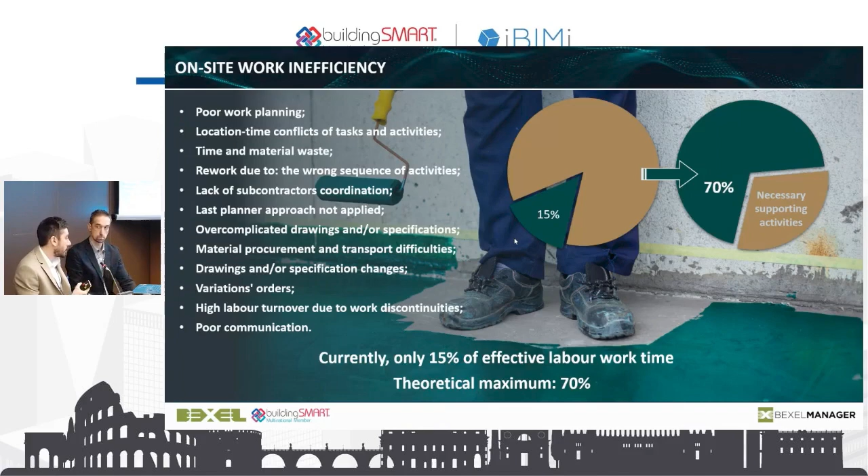First, whenever we start about construction industry in general, we have to start with the challenges and problems, and these are just some of the things that you have probably heard many times. What are the challenges in the industry in general? Those are the poor work planning, location time conflicts of tasks and activities, time and material waste. In general, construction projects are complex projects because more or less on every new project you're building a prototype, so all of these challenges are understandable. Overcoming such challenges is a big task in general.

What we tend to do these days is go with the common data environment approach, where we want to have a platform where all the participants of the projects could work together. But a challenge in this approach is that it often becomes a common document environment. What does this mean? It means that to digitize the process, for some people, means just to change the format from hard copy to digital copy of the document, and not change the workflow and not change, in general, how the data actually works.

What we mean by this is, digitize the process by simply converting your documents from hard copy to digital copy and then upload it to the CDE and share it with other participants. Of course, some documentation could be managed this way, but the majority of the project data had to be set up in a different way. It had to be organized and managed in such a way that you can see the portion of data that is relevant for you as a participant at the right moment.

And of course, that stakeholders could see a big picture of the project, and not just see documents which you have to open and read to understand, and then open a large amount of data to read it to understand what the big picture is. You need to have the option to actually inspect the data and sort it in a proper way.

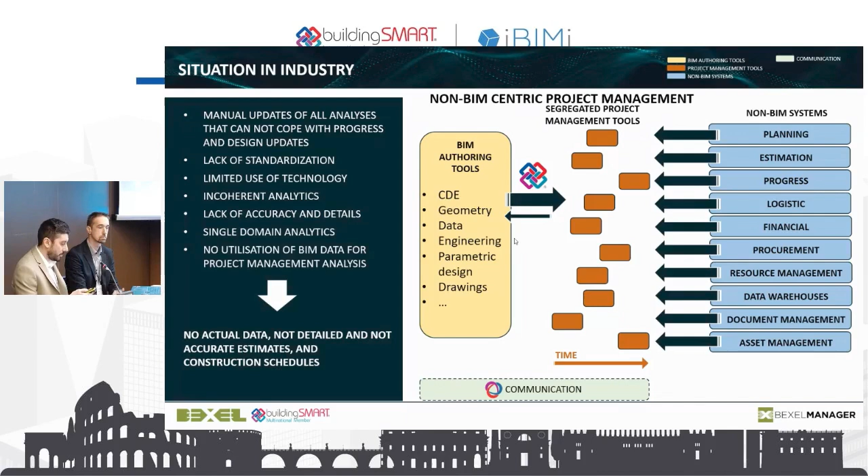It's in a wrong format. It's not machine readable. It's not standardized. And therefore, we are basically losing a lot of time on this rework in every new phase. And this is typically a characteristic of what we call non-BIM-centric project management.

The solution for this would be BIM-centric project management, where the project management process is integrated in terms of workflows and in terms of information source, which means that every stakeholder speaks the same language, data is transparent, data is traceable, and the participants can rely upon information delivered by other teams. So, of course, a prerequisite for this is standardization of data exchange, and this is where buildingSMART has a key role in making such concepts a reality.

So the goal is to improve efficiency, to streamline processes, to improve accuracy and time needed for data delivery, and of course to improve overall management engagement. So we can say that such an integrated BIM project management platform becomes a reliable source of project information, based on which accurate reports are produced and regularly updated. And such reports are then approved by managers and give them just-in-time information and a reliable base for their effective decision-making.

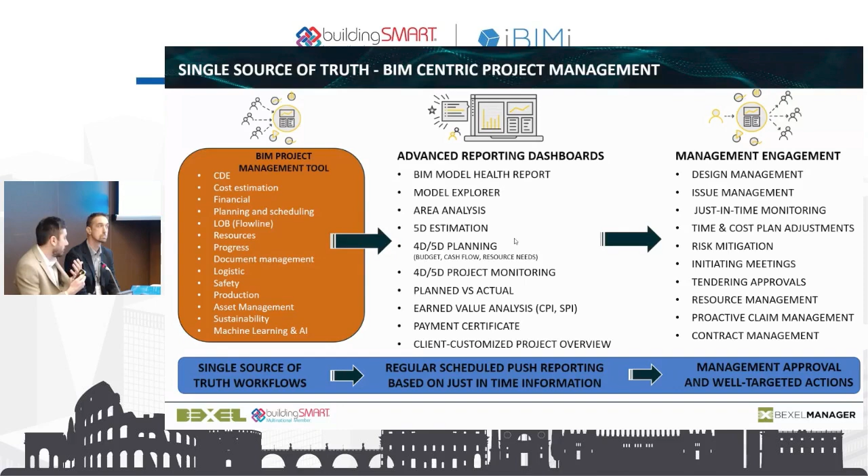So in short, the BIM model in this case becomes a single source of truth for all participants, and it encompasses all relevant information in one place, and a change in one place is reflected in all other places, so every participant has the same picture of the project.

Of course, in order to ensure such a role of the BIM model on the project, we have to make sure that all the data is reliable and verifiable. We have to ensure that data is machine readable and standardized, and we need to have automated quality control workflows to ensure that the large amount of information needed for such an integrated workflow can be processed on time and managed properly.

And of course, besides the data management and data control, which we mentioned in the previous slides, we also have to focus on the data creation process, or feeding the data into our single source of truth. So if we want to fully digitalize and streamline processes of data management, we have to create efficient processes of creating the data, of inputting the proper data into the source. People are not feeding the model with wrong or false data because they want to, but because they just don't have enough resources to do it properly in the traditional way.

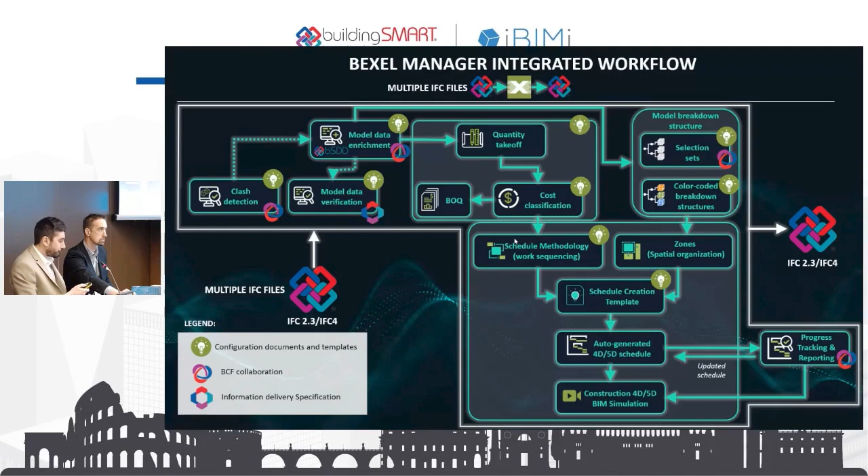And of course, one of the important parts is that all of these workflows are automated so that you can focus on creative tasks and improving quality of the data that are going to the model, and forget about the manual repetitive tasks that are just wasting the resources.

And this is the general workflow, which could be described as a chain of processes that are executed in a chronological order, more or less, throughout the project life cycle. But besides that general workflow, we also have in parallel two main processes that are present all the time. One is, of course, maintaining and updating the federated central BIM model. And another one is reporting and analytics.

So in every phase of the project, from every stakeholder, in every moment of the project, you need to report that data properly, in a proper way, at the right time, just in time, and you need to deliver it to the specific people that need to see that data, to understand the data, and to make decisions.

And today we will focus mostly on this process of reporting and how it works in our ecosystem in general. So we will go through the different processes in project management and explain the process itself, the level of automation achieved in these processes, but we will focus on reporting on the data that is created and that could be successfully managed as a result of these workflows. So now we will switch to my colleague, and he will cover the 3D workflows first, and then we will go with the 4D and 5D later.

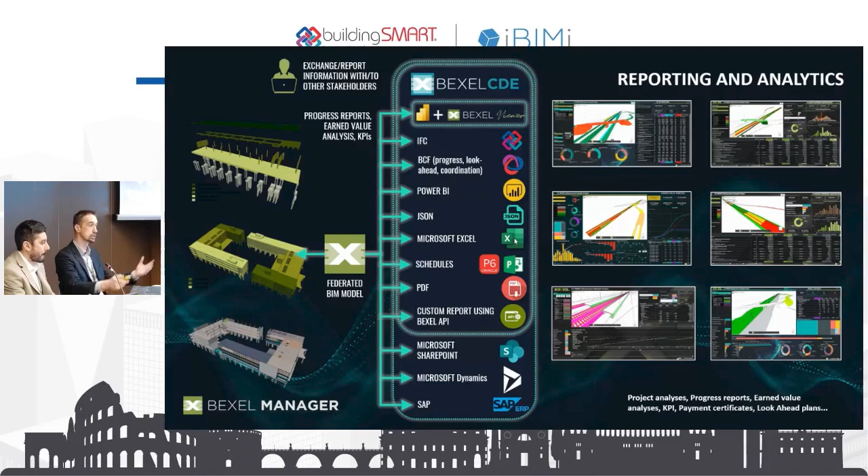and how this information can be properly organized so that each different participant can extract the portion of the information which is valuable for them at that specific time of the project, where this information should be analyzed and exchanged with the other participants as well.

So the first part is data verification, which is one of the most important processes related to quality assurance, and this applies to all project stages. In this case, BIM checks can be performed based on customized or standardized IDS analysis, and we prefer IDS based on Excel spreadsheets, because IDS structured and organized in a simple way is something that, as I mentioned before, anyone can easily understand and change.

So it's really simple and accessible to everyone, and the system will go through these multiple IDS facets and find issues. All elements which are not in compliance with the information delivery specification will be organized into groups by missing or inaccurate properties, missing or inaccurate attributes, classification, materials, and so on. And then all these results can be sent directly through BCF issues to other participants, or exported to Power BI reports, for example, which is, as I've said previously, one of the most important

processes in the coordination. So the first video, which I'm currently presenting, is more informative, just to understand how all this information is preserved in the form of a data container, and where all sources of information are stored. The entire process starts with publishing all results of the analysis created within the software used for BIM checks or other types of analysis. These results can be published to the cloud-based common data environment.

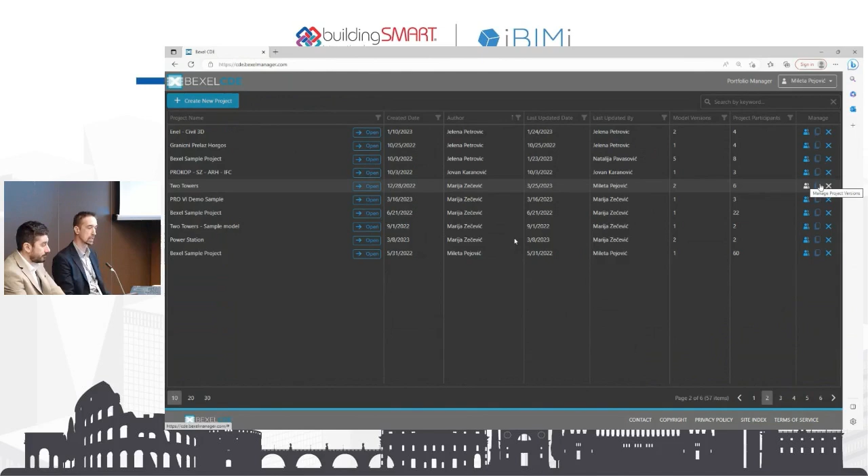And during this process, the user can even specify which part of the IFC file information they want to send to the cloud. These could be the originally used IFC files or segregated into smaller pieces in case you don't want to share or expose entire projects to everyone. In each revision of this published information, we have the history saved, so you can always go back to explore the previous results and information, all stored on the cloud. Project attributes and properties are also saved without any data loss.

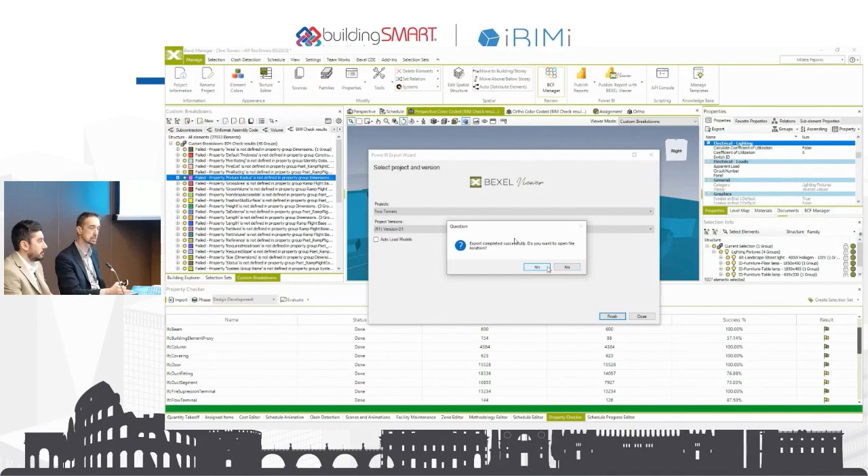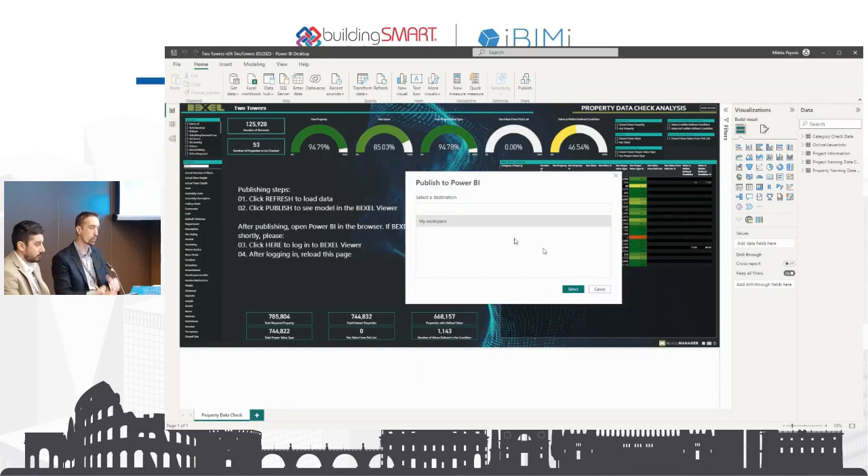On the other hand, all results of performed analysis with additional information such as coloring schemas, clash results, property check results, cost and schedule information are also saved and exported into external sources of information in the form of JSON or Excel spreadsheets. These results are linked to previously exported IFC data, and customizable Power BI reports can present different types of information to different project participants in a really meaningful manner. From personal experience, these results are organized into really clear and visually stunning information, easy to understand for different types of participants.

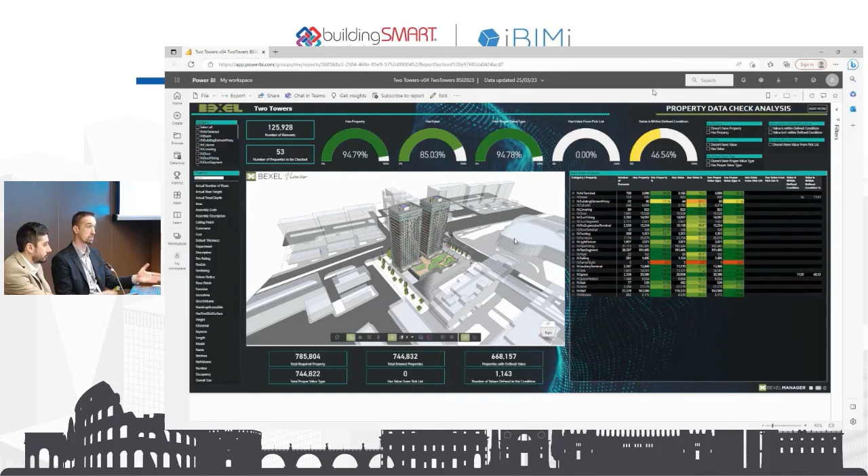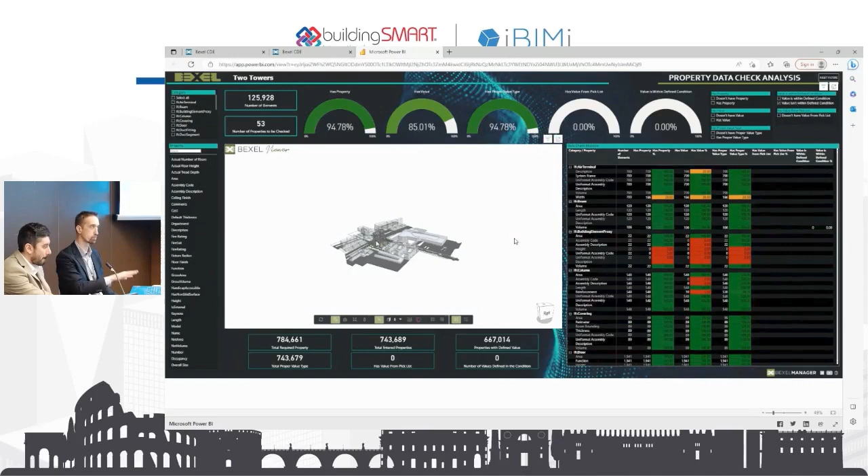So in this way, we could introduce BIM checks to the design team in one way, but also present all these analyses and results of BIM checks to, for example, clients in a slightly different way. So everyone can just take the information which is relevant for them and which is the main focus of the participants analyzing these results. By doing so, we can evaluate and organize inconsistencies. As you may see in the video, all these results can be differently organized. We can analyze different IFC entities, different classifications of the elements, and all the data can be stored and accessible anytime.

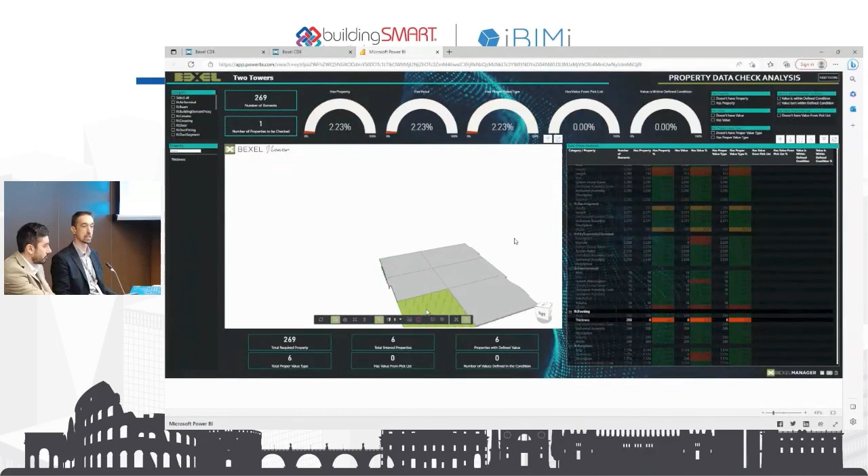And when the project is updated, and this is one of the best benefits of this kind of approach, the system will automatically update results. Just by using the export button, we can export all these results again. Everything is stored on cloud, and we have another revision of these results, which can again be visualized and analyzed for the next stage of the project.

Another important type of BIM analysis, especially in the early stages of the project, is coordination and collaboration between different trades, and performing clash detection is valuable in every project. To briefly explain the automation: it starts with the federated BIM project, which is fed with predefined or standardized templates for creating clash detection groups on one hand, and clash detection configuration templates on the other, which are mixed together, and the system will automatically find issues between different trades and groups. All results can be instantly saved and exported to different types of reports.

You may see that these reports could be different types: PDF files, Excel spreadsheets, HTML files through API to connect with different systems, and also Power BI reports directly. So again, everything is stored on cloud.

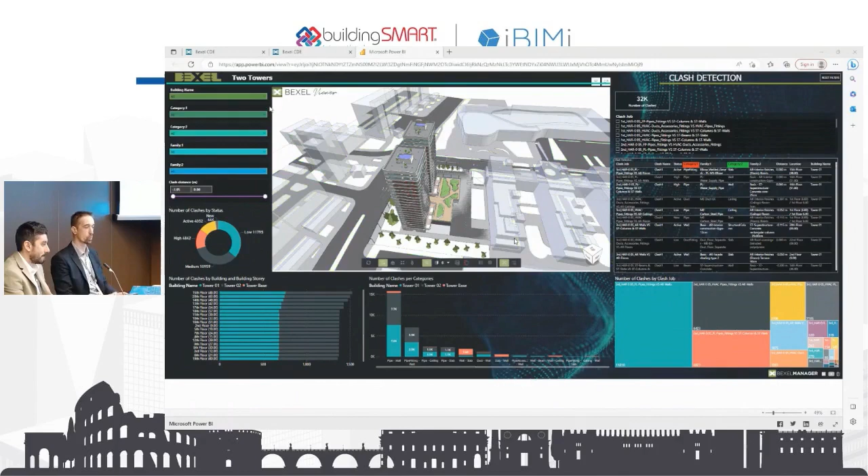All this information, as I said previously, when the Power BI report is open from this system, we can analyze results. And again, based on different data subsets which can be exported, different results can be saved on cloud and also presented to different participants of the project.

For example, clash results between coordinators and between design teams are presented differently, and also for subcontractors, for example, we can include cost and schedule data. So a client or the project owner can see clash detection analysis combined with the cost information.

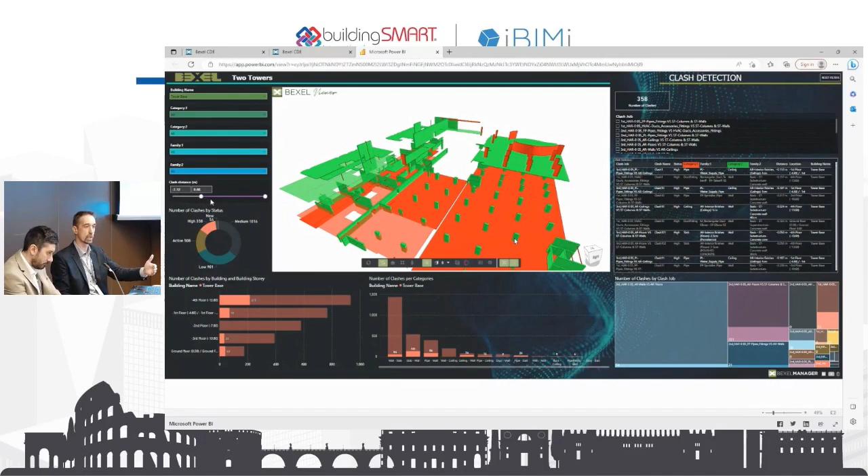And for example, design team can just see clash detection collisions between different trades without any other information which are not related or important for them. So they can just analyze information related to, in this case, different buildings, different trades, different types or priorities of these clashes, and also some common information such as building stories or different subcontractors.

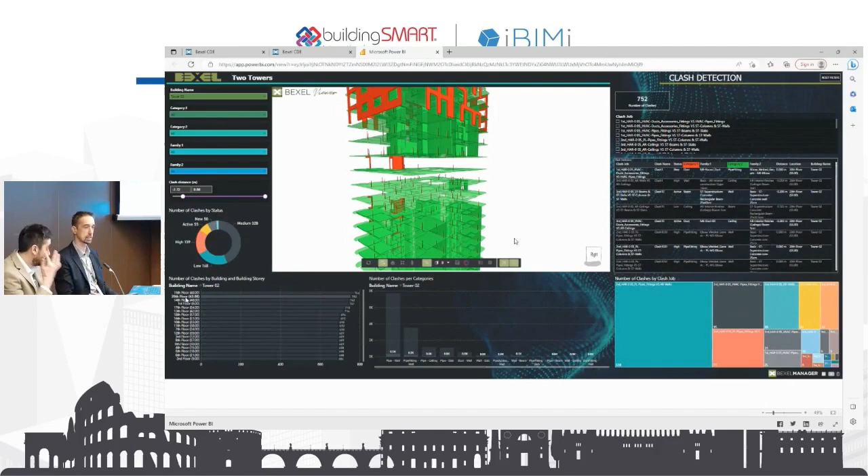So every subcontractor, or any trade, can see the clashes between just their own different types of installation, or multiple trades or multiple subcontractors can see where they have collisions with the installations between each other. So all these found issues can be relatively easily identified and also organized and resolved in order to avoid any possible issues during the construction itself.

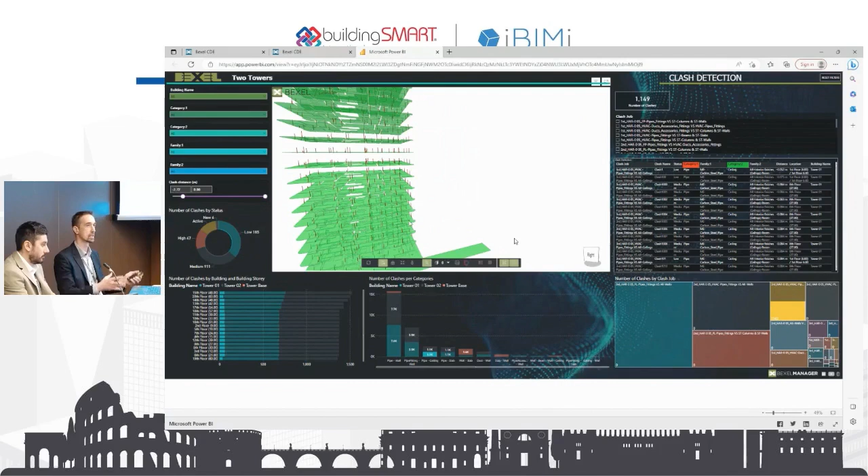And of course, if the clash analyses are performed progressively during several months of this kind of progressive clash testing and design collaboration, we can also export this kind of data, which contains all this progressively saved information during multiple previous months of coordination process.

These results can also be exported into different types of results, for example, combined information into portfolio manager. And this is something that I will show you a little bit later. But currently, these are just different types of views which anyone who is actually exploring the process of clash detection can access very easily.

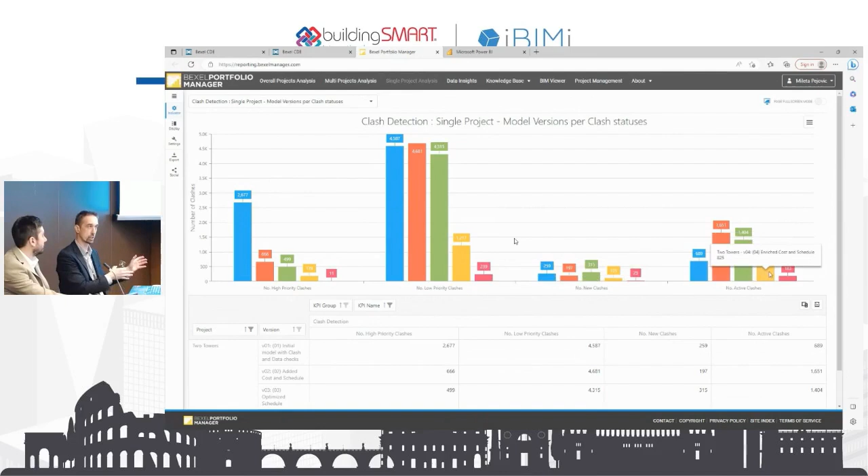All these results, which are done in a past period, can be exported into this kind of cloud-based platform, which saves all this data, not just from one project or multiple versions of one project, but also from multiple types of the project. So you can analyze different types of collision, or not just collision. We here talk about clash detection, but you can also analyze cost information in this manner.

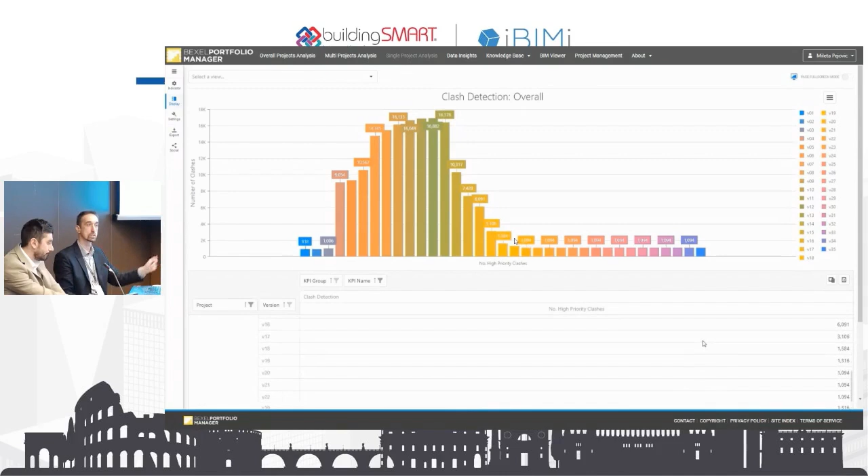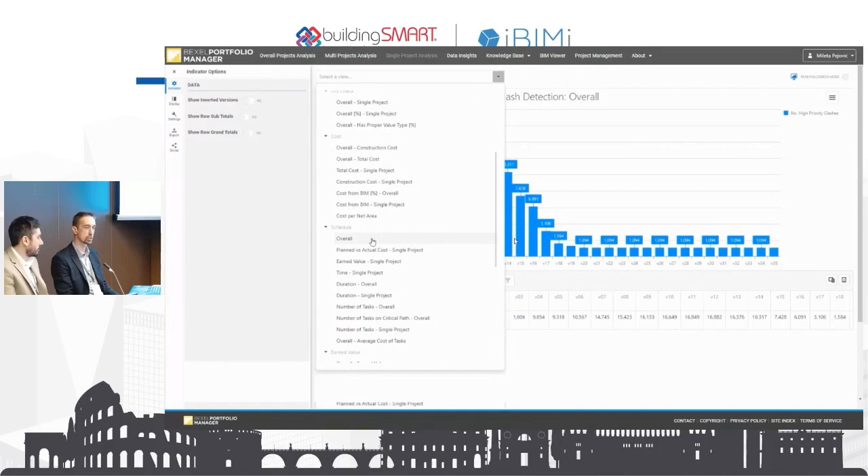You can analyze the quantity information, multiple buildings, multiple types of the project, and analyze what is the cost of this type of project against another type of project in multiple different countries. So you can analyze, okay, this is a cost or number of the clashes which I obtained in one country, and this is the number of the clashes in a similar building, similar size of building, in the other country. So this kind of information is really valuable for the project owners as well.

So even if the model is missing some required properties or values of these properties, or if some of these things are not accurate, we can use another feature or another process to automate the data enrichment of the model itself. And again, based on using customizable Excel spreadsheets, for example, because these are open BIM standard, we can add information or properties to BIM elements.

And all properties, no matter if these are original or added, can also be saved within the IFC schema or separately as separate chunks of information and exported to Power BI. This allows us to do various Power BI templates for different purposes.

And also, I just want to mention that if we previously, for example, used IDS for verification of the quality of the BIM model, similar templates for IDS could be used for data enrichment. So based on, for example, IFC entities or attributes of some of the elements, we can do a similar thing to enrich existing elements based on these predefined attributes.

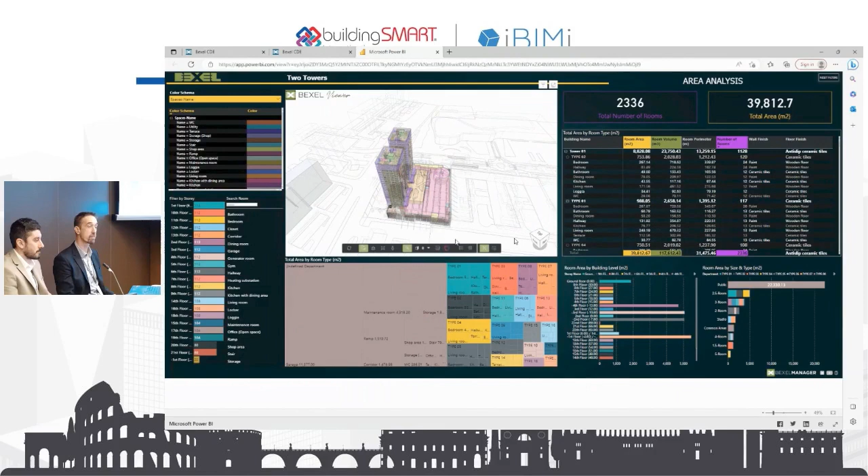From the, let's say, open BIM uses, using our application, we can export different types of information. And as I've said previously, it's really important to decide which information we want to share, at which point we want to share information with respective participants on the project. And in this case, we, for example, are just sharing or analyzing area information.

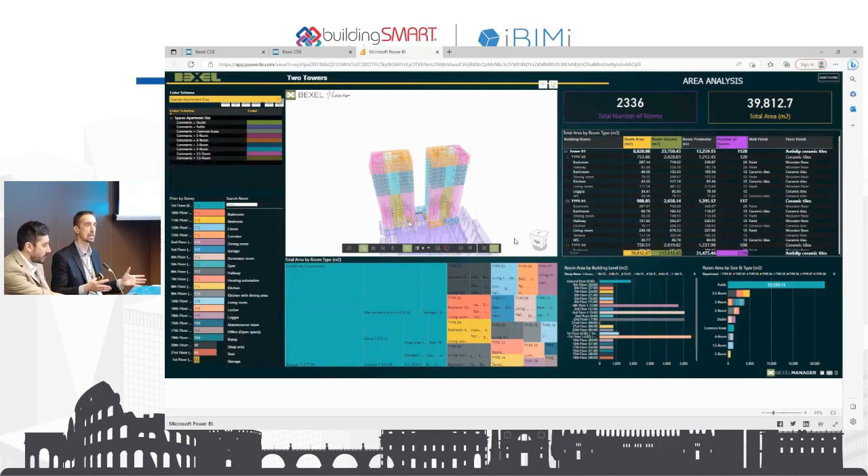So in this case, IFC spaces information is actually sent to the cloud, and using, in this case, a Power BI template, which is done for this specific purpose of the project, we can analyze areas of the project. And this could be really useful in the initial stages when we're deciding about the areas, which types of areas of the project these should be.

And based on results of these types of analysis, we could discuss when and what on the project should be changed before the construction or the next stage of the project starts. For example, from the concept design to the real, let's say, issue for construction stages. And this is just one of the examples how we can use this data and how this data is actually saved.

So in one place of this template, we can see quantities of the different areas, but on the viewer, we can see different types of color schema. So we can always see, for example, area, volume, number of users who can populate a specific area, or we can see, for example, finishing types of floors, walls, ceilings. And at the same time, we can analyze how these areas are differently, let's say, structured.

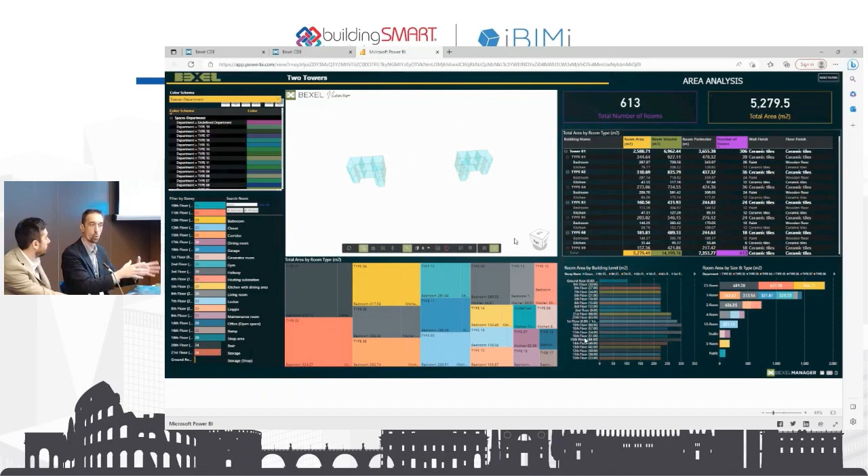If we see, for example, in this case, different departments, different types of areas, or different uses of this area, we can differently color code all this information based on what we currently want to explore. In this case, we see, for example, different departments, multiple types of the projects, and in this case, 8 different types of rooms. Each of these has different, let's say, types of rooms itself.

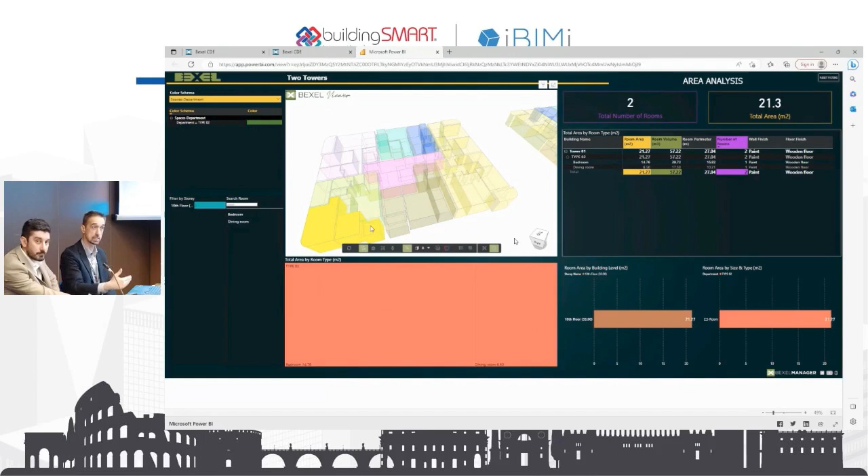We have areas, rooms, zones, whatever, and all these can be differently color-coded, differently organized into different, let's say, buildings, stories, sizes of these rooms, anything. Also, we can include information about the usage of electricity per each room, or, for example, lighting analysis as well. So all this information can be stored, exported, and again, it depends on the user which information they want to use and for which purpose they want to analyze this information.

And this is just another example, a different type of project. This was previously two high-rise buildings, but in this case, we have a power station building. And a power station building has totally different types of areas. So these different types of areas can be organized in a different way. We can analyze different information.

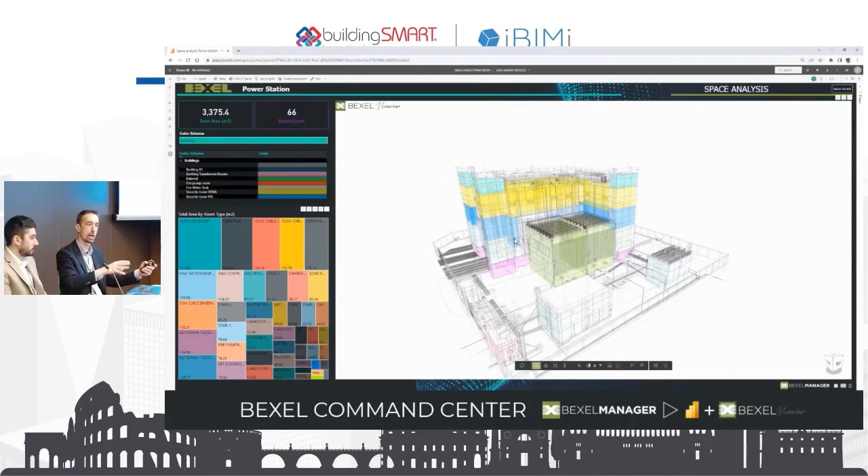We now don't really need to understand what the different types of rooms are which can be used to sell different types of, let's say, apartments. In this case, we are more interested in, let's say, power consumption. So in this case, we can analyze power consumption information. We can analyze all different aspects of information which are stored and available based on what we want to analyze at a specific moment.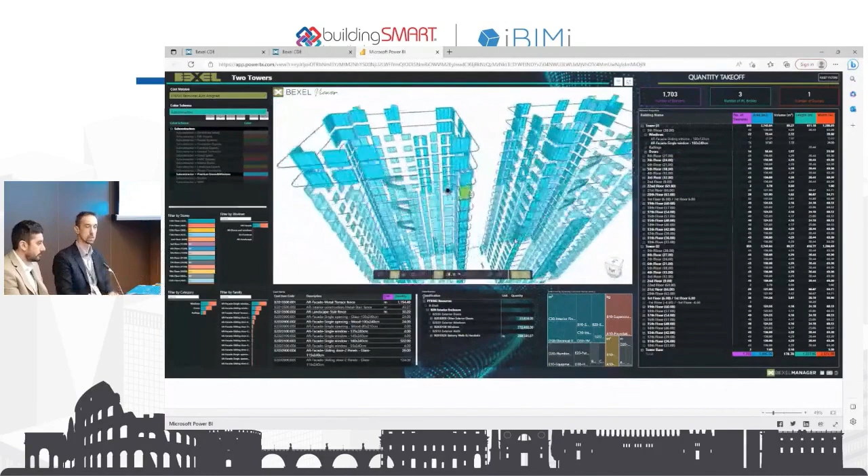So another example of how we can export and again analyze different types of information in a timely manner is quantity takeoff. Previously we analyzed, for example, just simple spaces, but in this case we decided to just share quantity information. So we have 3D IFC information related to geometry of the elements, related to the quantity takeoff of the same elements that we currently see. So we decided not to share, for example, cost data, data related to clash information, property checks, and so on. In this case, the template that I'm presenting now is used for quantity takeoffs.

And someone who actually wants to do some kind of tendering packages can use these quantity takeoffs to organize data, organize packages that they want to create or to share with other participants on the project. And this is really interesting because it's interactive and it's really easily accessible.

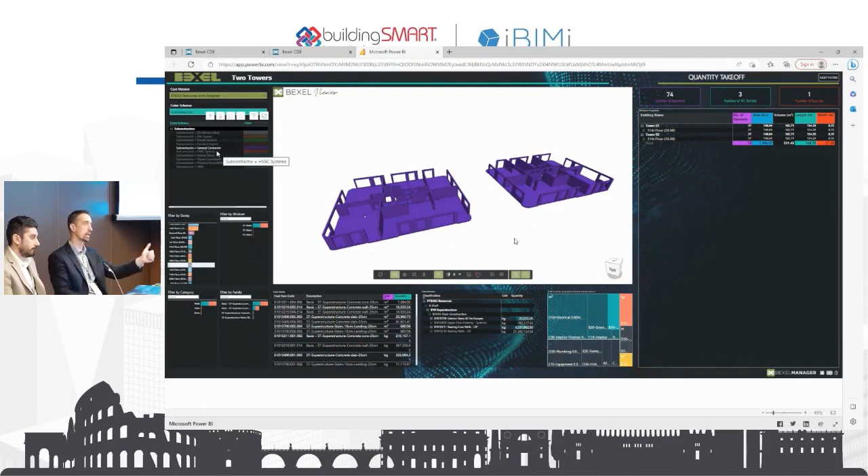So anyone who has a relatively simple understanding of how the entire system works, where the information is saved, and what is behind the IFC standards, can just simply analyze this kind of template and understand, okay, this is where my quantities are, these are the accurate quantities, and for example, analyze these quantities based on subcontractor, different types of elements, different building stories, different trades.

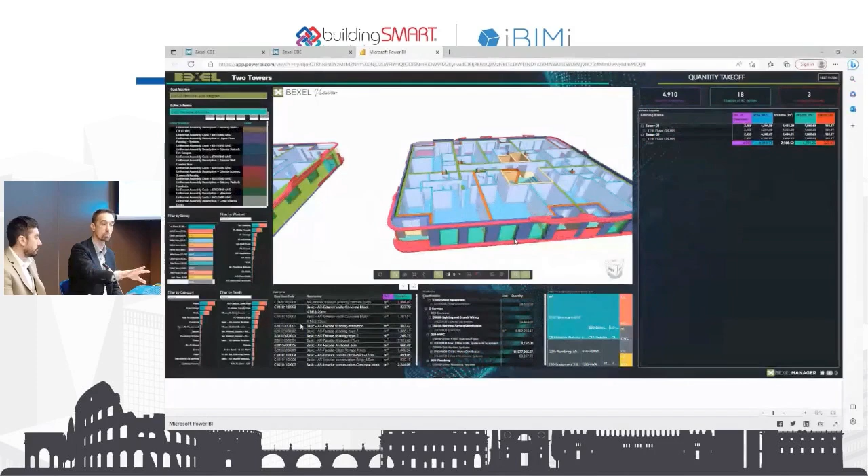For example, we can simply analyze the piping system, where and what kind of piping systems we have in each level of the building, and then we can analyze each quantity item of these selected or visually presented items, and we can see exactly what the quantity is and what type of information it is. Also, we can color code these elements based on, for example, a classification system, in this case Uniformat classification, or we can do any kind of color coding based on any classification system.

So everything is totally open to everyone, and based on the project itself. So any classification that you are using, all this information is linked to 3D elements, and then we can analyze and export this information and separately use different types of information for the specific use case that we are currently working with.

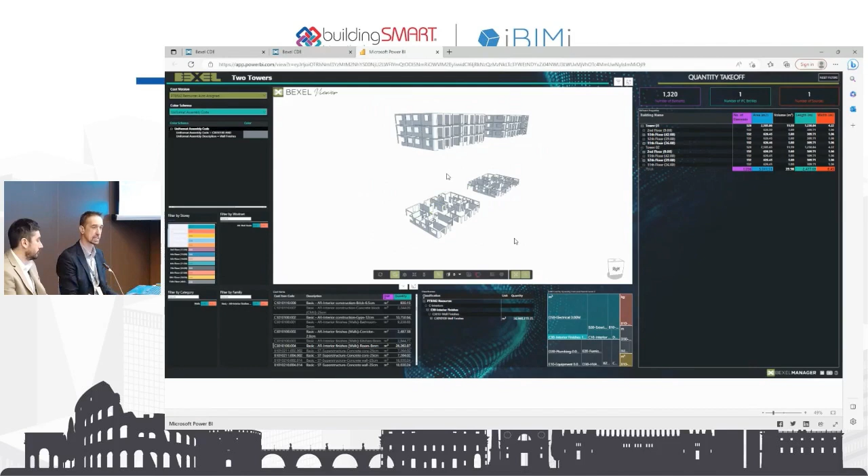In this case, for example, I'm just presenting some interior partition walls on multiple stories. And we can really easily see where and what type of these partition walls are. And again, we can very easily understand what is the quantity, what exactly are the types of these walls. And again, this could be done for any type of quantity item or any building part.

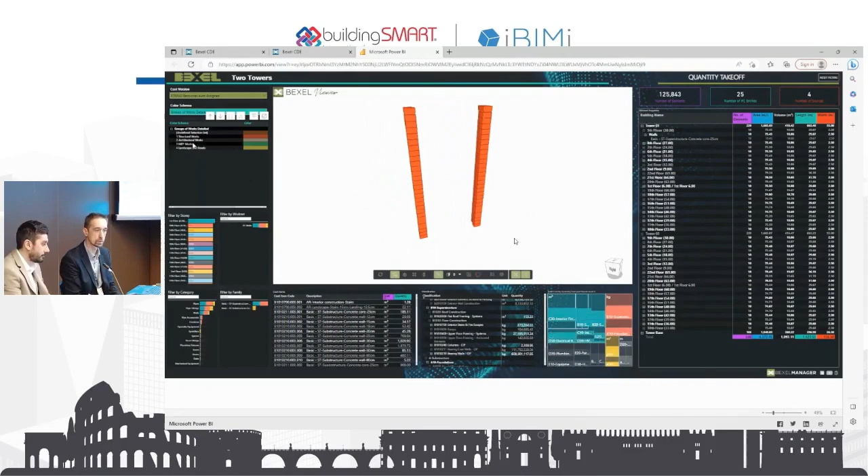So foundations, now we can just analyze foundations based on specific subcontractor, different types of structural works, core walls. Really simply, we can visualize and understand where and what type of the works are. And then this kind of information, again, is saved. When we update the project, information is updated. So we can just update the entire Power BI template to the online.

And then when we access the online platform, we can see the previous results, history, and we can see the updated information as well. And we can see what the changes are, and we can have the relevant information just in time.

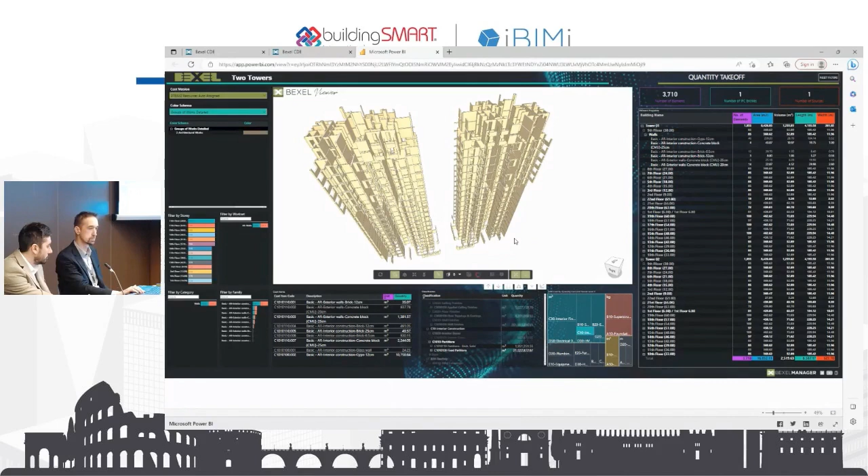And again, just for the last example related to the quantity analysis, or the part of the session which is related to analyzing more or less simple information such as quantity takeoff properties, clash detection information, more or less all information which can be automatically obtained from the information directly extracted from the geometry or IFC files itself.

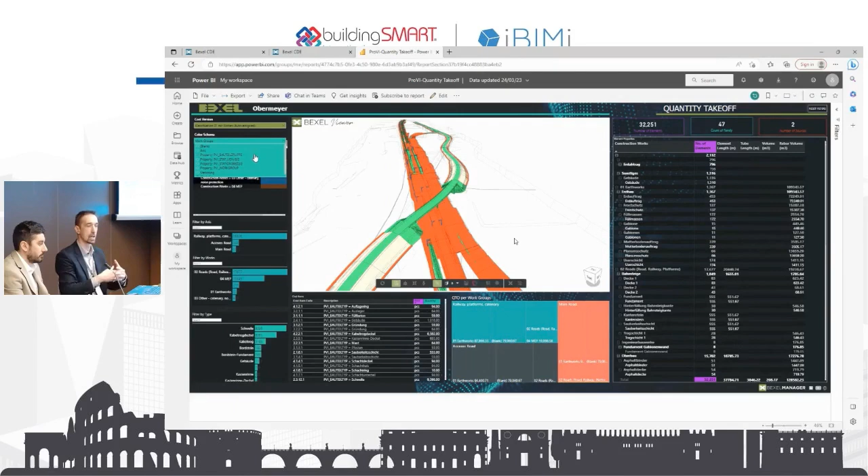And in this case, I'm just presenting how the same or similar template for quantity takeoff can be applied for an infrastructure project. In this case, it's a railway project, and we can analyze quantities based on different types of works, for example, for railway, for a road, or for the bridge above the rail, and also based on the subcontractor. So if we have multiple subcontractors, or again, different types of work.

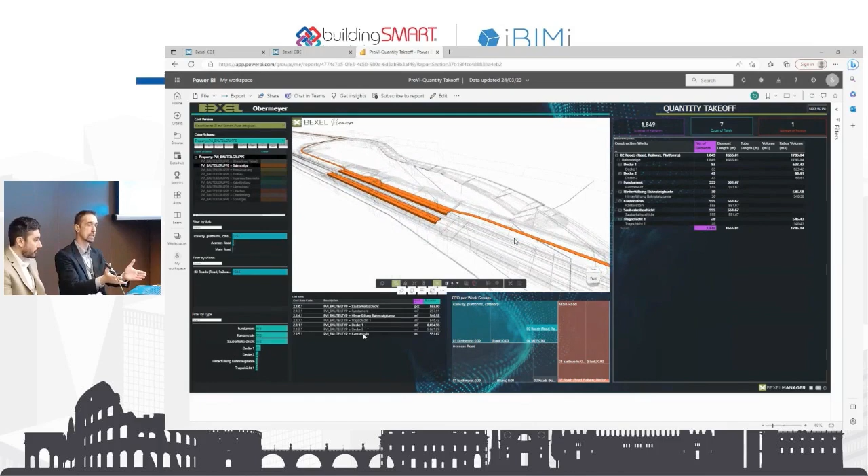This is, for example, excavation, but we can see different types of work, for example, concrete works, or setting up the electrical railway roads, or something like that. So anything can be easily accessed by anyone. It's quite a simple type of template containing relevant information. And this is, again, related to the information which can be almost automatically extracted from the IFC files, and maybe additionally enriched if it's needed.

But now I want to hand over again to my colleague to explain a little bit more advanced processes, when we can extract and analyze information not just automatically extracted from the BIM model itself, but something that we can do additionally by adding cost information, schedule information, and so on.

Thank you, Mileta. So if we talk about cost management in our platform, we have two general approaches. The first one is a more straightforward one, where you have your cost classification system, whatever type and standardization it is, or if it's completely customized for a company, and you basically can import that cost classification in the form of a machine-readable Excel spreadsheet, define what we call element queries, or the filters, which will allow the link between cost item definitions and the models, and a quantity formula, which will define the way you're quantifying your data for that specific cost item. And then, of course, link it to the model elements.

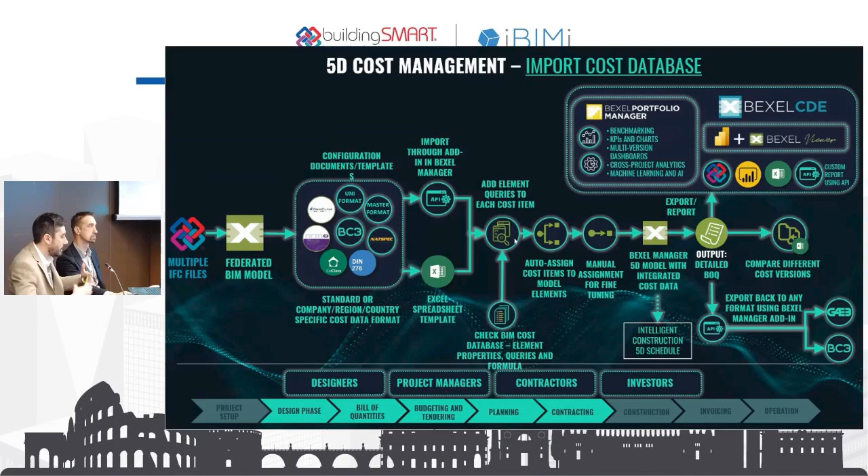And with every new update of the model, the process of updating the cost is basically completely automated when you just update the existing cost classification, of course. And that cost classification then could be reused on the next project, and you're just using the knowledge that you have acquired on one project, enriching it, updating it, and making that knowledge base bigger.

Another one is where you have the ability to use predefined templates to auto-generate cost classification. So where you don't have the cost classification with the defined rules linking the model elements, where you don't have the quantity formulas predefined for every cost item, but you have templates which you load from your knowledge base that are prepared, and that automatically, based on these templates, based on the coding system that you have, based on the quantity calculation rules, define the cost classification for every new project.

Both of these processes are highly automated and allow you to free up the resources needed, in the first place engineering hours, for the 5D phase of the project, so that the experts could focus on the creative work. Experts could focus on creating reliable, accurate data that is up to date with every new project update, and not lose their time calculating something in a manual way, where even when they get good information, too many resources are spent on that specific calculation, and that information is already outdated.

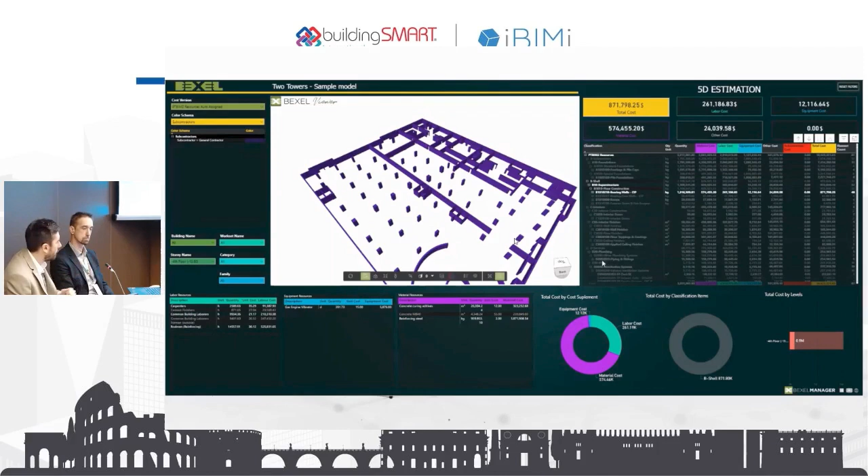As a result of this process, we can export such interactive Power BI dashboards, where other participants could approach this database, but not only see it as a single database or some PDF document where I have to go through the rows to find exactly what part of the cost classification is relevant to them. They could very easily sort the data, reorganize the data, and focus on the part that is relevant for them in that moment.

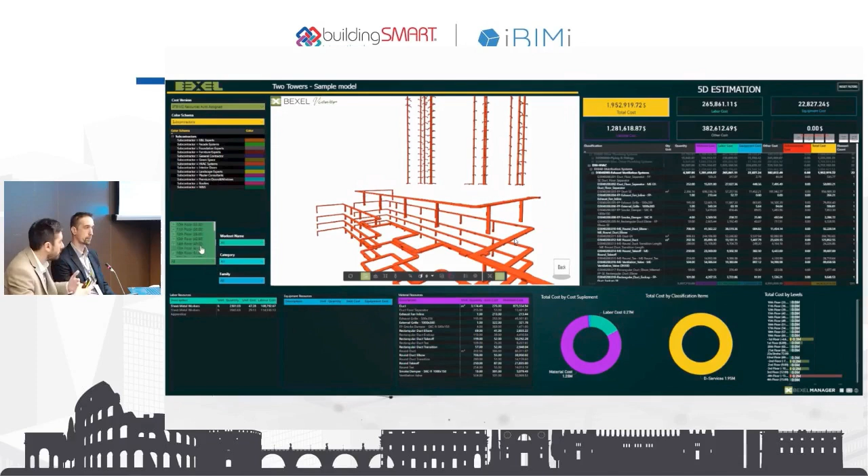And that's the major power of this approach, where all that data is very easily readable and manageable. Maybe for one subcontractor it is important to manage resources, or the other one is managing just the unit prices and things like that. So you can customize these reports in an unlimited number of ways, see the relevant information in the relevant moment, and navigate very easily to the part of this cost database, of this budget, that is important to you.

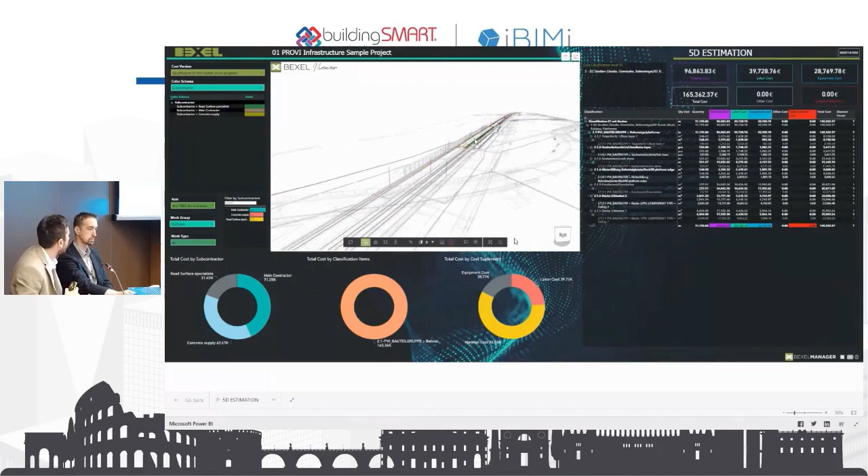This is again a very simple example of the same dashboard, the same type of information, on a completely different type of project, infrastructure, where you don't have standardized classification systems in terms of IFC entities and all the relevant classification categories, but you can still access this database and navigate to the custom properties defining your spatial structure, your work groups structure, and easily see the part of the project that is relevant for you, whether it's a subcontractor, a work type, or some spatial category.

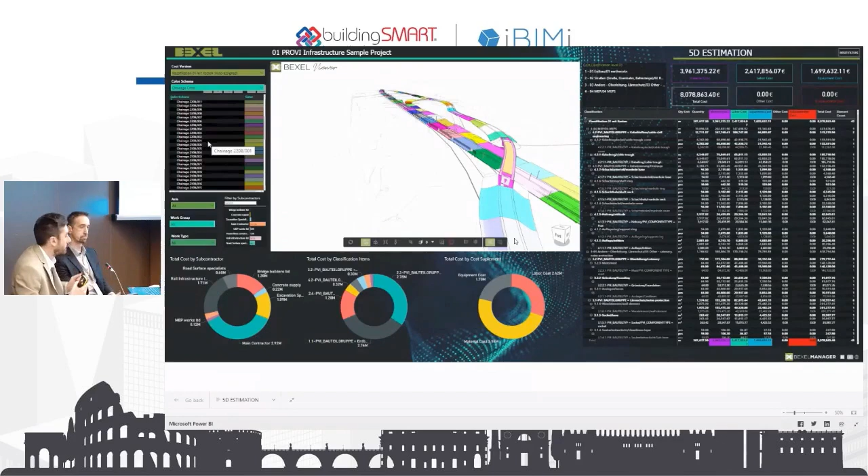And of course, it gives you the opportunity to have verifiable data in the first place. When you click on certain information that tells you how much something costs and what the quantity of certain work is, you can see exactly what was meant by the person who created that data, the BIM manager or in this case the quantity surveyor, what he was counting in when he calculated it. That's the highest quality of this approach, where you don't just look at the numbers and have to trust them. And in most cases, people just don't trust them.

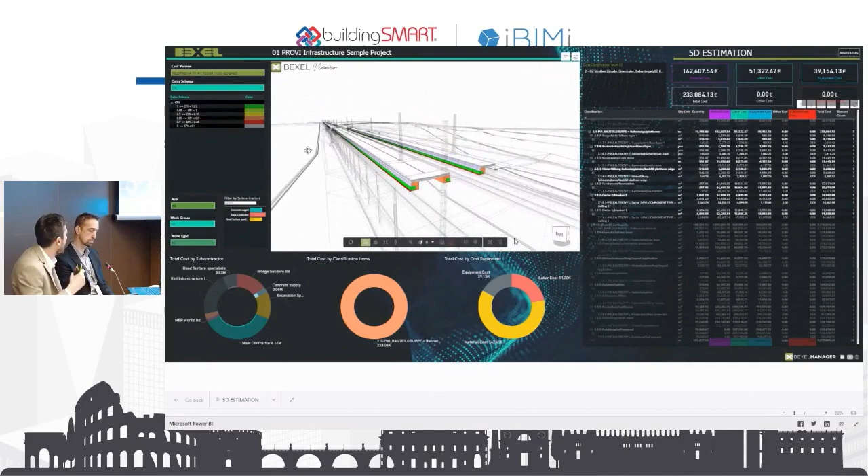They just raise the contingency, and that's why prices go higher and risks are higher, and then everybody loses. So in this case, data is transparent, data is traceable. You can trace the source of the data, so whatever changes in the source changes in the data as well. And you can make sure that what you're seeing is what was actually calculated. So that's probably the main advantage of such an approach.

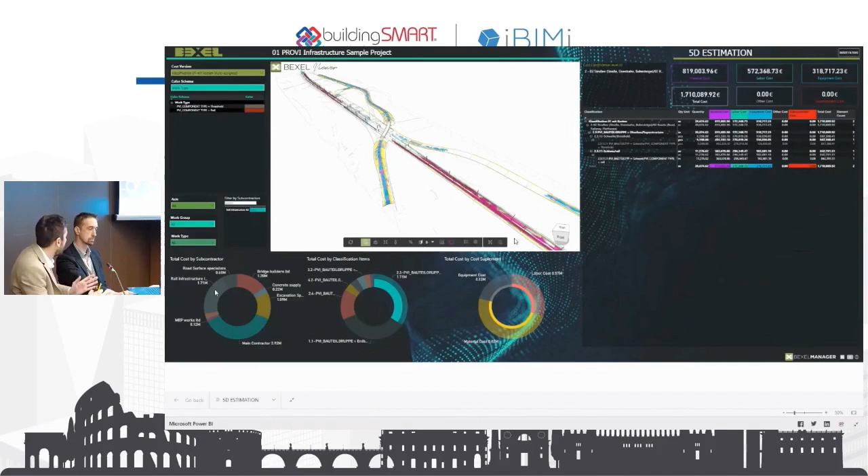Of course, the platform itself also allows you to create animations in this sort of report, which again gives you the opportunity to combine different domains and see not just the 5D data and the cost, but also the time dimension of the cost. So you can see when you're going to have certain types of works, when you're going to get certain subcontractors, and so on.

When we talk about 4D and 5D construction planning, this is probably the most complex part of the project management workflow, I would say. It requires a lot of engineering hours to develop proper schedules, and then to link those schedules with the resources and with the model elements. So this is where we press really hard when it comes to automation, and where we probably achieve the best results, I would say.

We were able to automate the process of generating the construction schedule, where we abandon the workflow of creating one task at a time, one relationship at a time, and allow the planner to focus on the logic of the schedule, on the work sequence, the spatial structure of the project, the optimization of the schedule, and get rid of repeating the same schedule tasks and relationships and wasting hours on manual labor.

So I'm going to try to briefly explain to you the logic behind this system. We basically analyzed how the planning process works in general, and it simply goes through two main processes. One is spatial project organization, or spatial works distribution, where you distribute the works on your project by spatial categories. That means if you have two buildings on the project, you're first going to distribute it to building 1 and building 2 and define the relationship between these two zones.

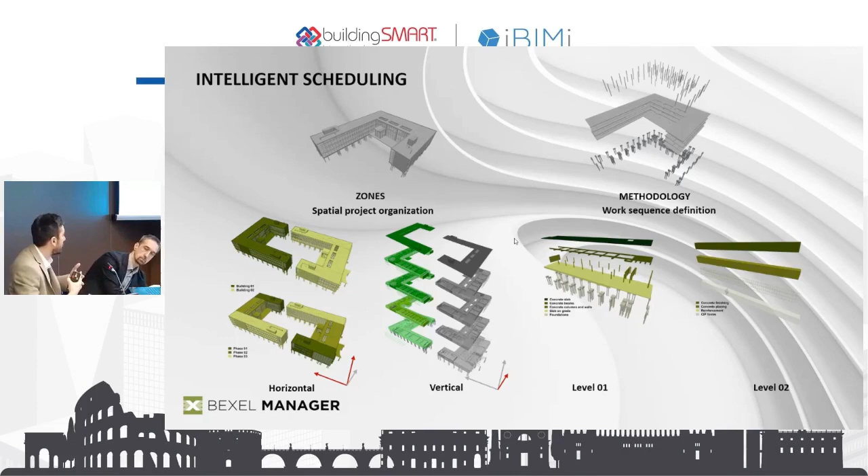So in our approach, we're organizing levels of schedule structure. That means you're organizing levels of spatial organization and levels of work sequence definition for a complete project in one central place. And then the computer algorithm combines all of these logics together and creates the schedule itself.

So just to simplify it, you specify the order of executing the buildings, then the order of executing the activities, sub-activities, floors, and subzones. And the algorithm combines all of these logics and creates the schedule, meaning it creates the tasks and the relationships based on the logic the human planner created and input. Why is this important?

It is important not only because it cuts the time for planning itself, but because the whole process is scalable. The effort you have to use for a 2-building project is more or less equal to a much larger project of 20 buildings, because you're just defining the logic of schedule organization.

So let's say those are two projects with the same technology of execution. The methodology of work sequence is more or less the same, so you can reuse the knowledge from the previous project. You just modify the spatial structure of the project, which is more complex in this case, and you get a schedule that is like 15 times bigger, but with more or less the same engineering hours spent to get good results.

And why is this important? Because this gives you the opportunity to create accurate, detailed schedules, and a more detailed schedule is in general more accurate and more realistic. It gives you enough time to focus on what is relevant, on optimization of the schedule, on resource leveling, on all those things you just don't have enough resources to do if you go with detailed scheduling in the traditional way.

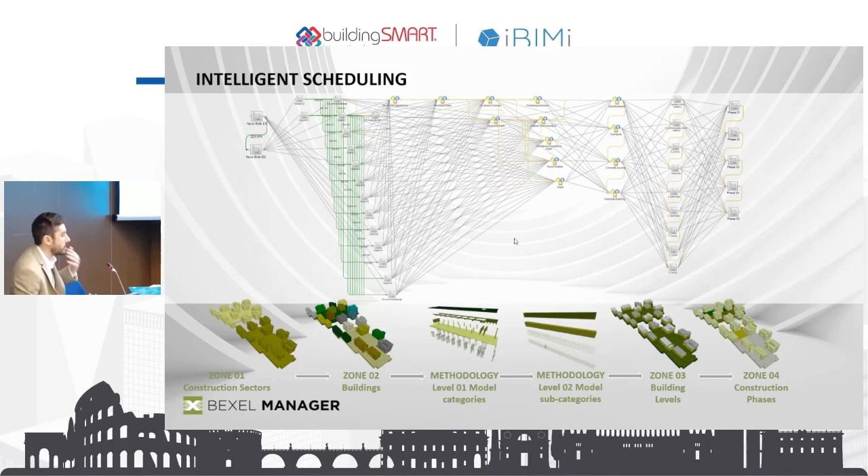Also, this methodology is not limited to this example of high-rise buildings. We also use it very well in infrastructure, where the spatial logic is a little bit different. You don't have horizontal and vertical distribution of works because those are linear projects, but you have linear work distribution in terms of chainages and axes of execution, and you can reuse the methodology in the same way as with the buildings.

What this means: if I build a tunnel or 5 tunnels, I'm going to create the methodology for one of these tunnels and use it on all 5, if the technology is the same, because the work sequence is the same, and I can just rely upon the system.

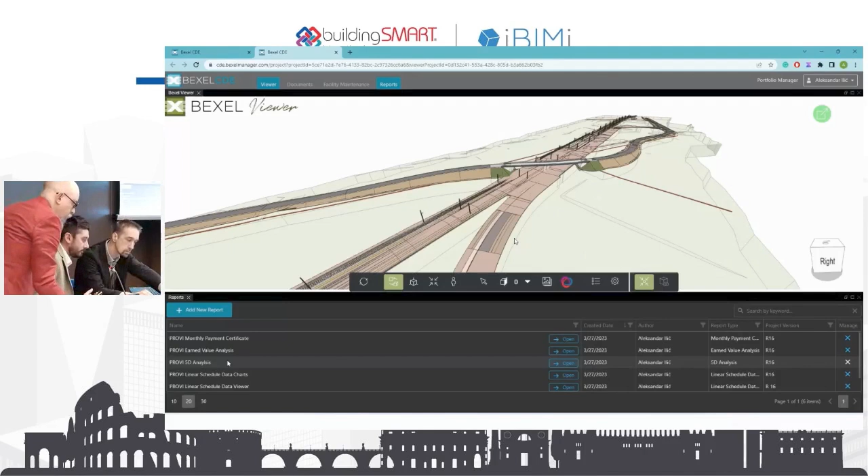Can you just, yeah. Okay, thanks.

So, okay, today I wanted to show this video, which is specific, but shows you the power of this approach of managing the data, I would say. So this is a completely linear schedule, linear project. It's an infrastructure project, a railway project in Germany.

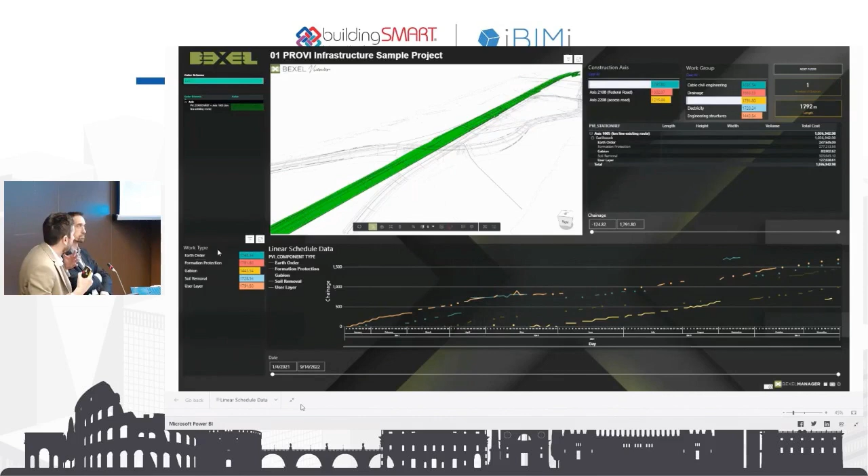And the point is that, let's say, visualizing the data for the schedule doesn't have the same requirements as with the high-rise building. So the Gantt chart is not that useful. The line of balance view, again, is not giving you the complete accurate picture of the project. This is where most of the planners require what we call linear schedule data.

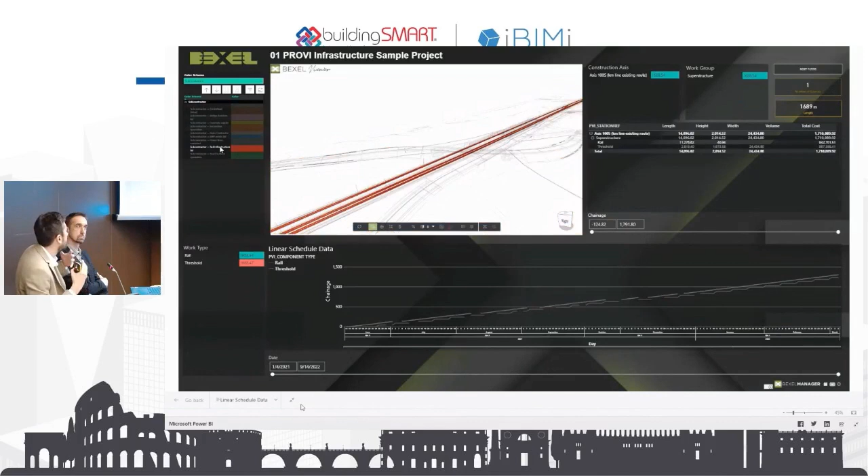And by managing the data in such a way that you can just export everything from BIM in an open format, and you can, I would say, play around with all the data and reorganize it the way you want, we can just simply in Power BI achieve what we need. We can just recreate the linear schedule data and actually see the project data.

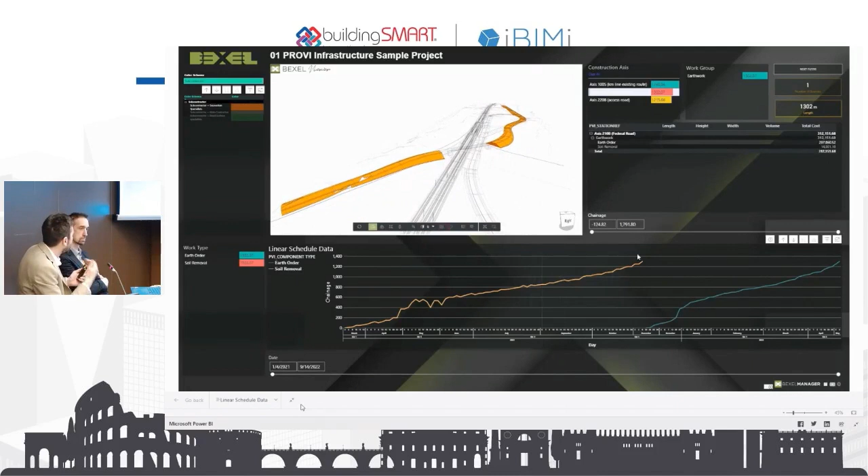So it's the same project data as with any other project, but we can reorganize it to see it the way we want to see it. So in this case, we want to see a linear diagram, because that diagram gives us a better perspective of how this project is going to be executed.

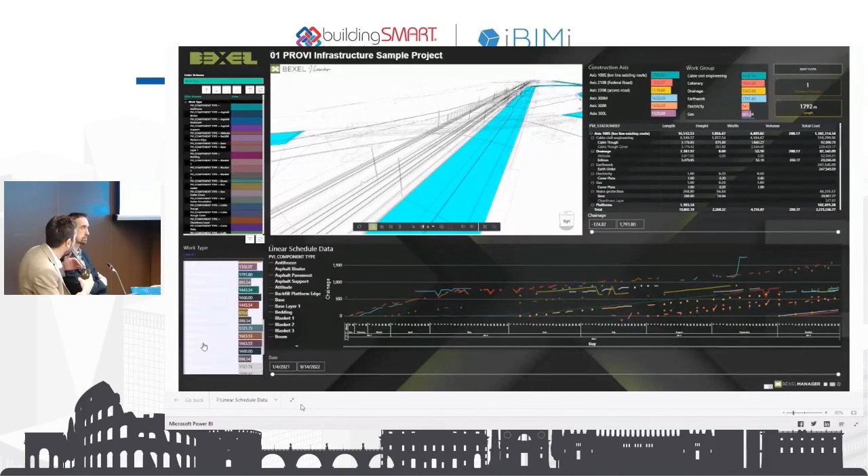Of course, again, this is an infrastructure project, so all the locational and functional properties are more or less project unique, customized. So also with this approach, we have the ability to export all of these project-specific properties and to use them to sort and subdivide the data in the project, or in this case, progress data, schedule data.

And of course, we also have the ability to visualize the schedule itself. So to visualize animation and to combine that visualized animation with the linear schedule data that is relevant for this specific workflow and for this specific project.

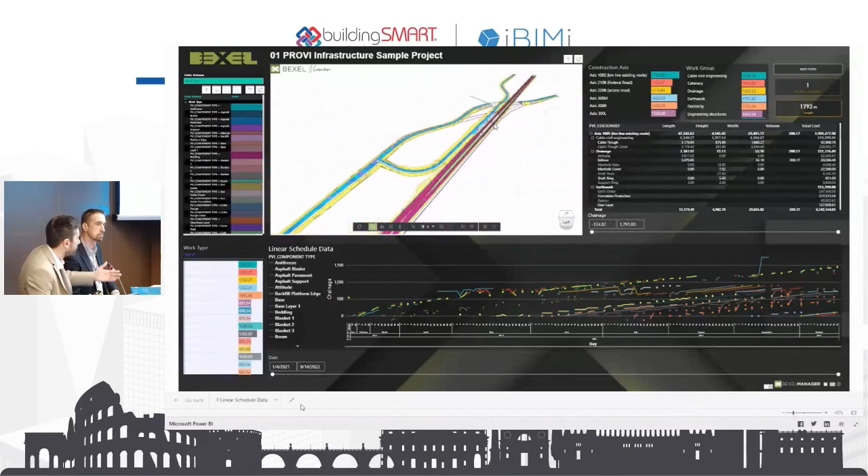And so this is, I would say, when we go beyond the software, beyond the platform. So you don't need to have a user interface in the platform. If you want to see something that is specific for your type of project, you can just export the data, organize the data the way you want, and visualize it the way you want.

In the same way as in previous cases, you have traceability. So whenever you select part of this line graph, you can see which element it refers to. So data is reliable and the data source is transparent, as it is in the user interface of some platforms.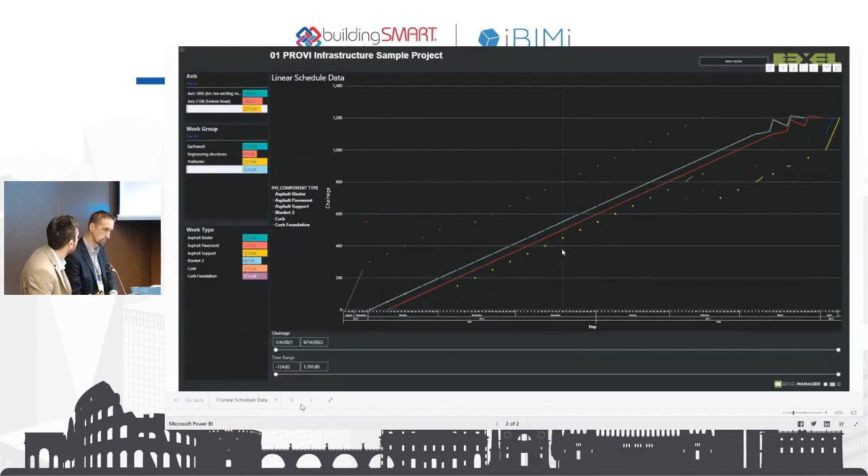So this is probably the best way of using this way of managing the data of the BIM project and exporting it, because it gives you freedom to customize what you have in your BIM model, and you're not limited by the user interface. You're not limited by the platform itself. You can just organize it the way you need it.

Another process that is also important in our approach, in our ecosystem, more or less, is the BIM progress monitoring process, where we again try to automate BIM progress monitoring, and to avoid, I would say, unreliable data when somebody is sitting on the construction site and just assessing by themselves if this is 20-30% complete.

In our approach, it is a bit different, because we have a BIM model, we have integrated 5D data, so resources, cost. We have integrated 4D. We have a pretty detailed schedule. We have the opportunity to easily create or define what we call look-ahead plans.

That means that we can, in the form of BCF format, share with the people on site exactly which elements are planned to be executed in which period of time. They could again see through these reports a link between those elements and the needed resources to execute them. So they could plan their process in a better way.

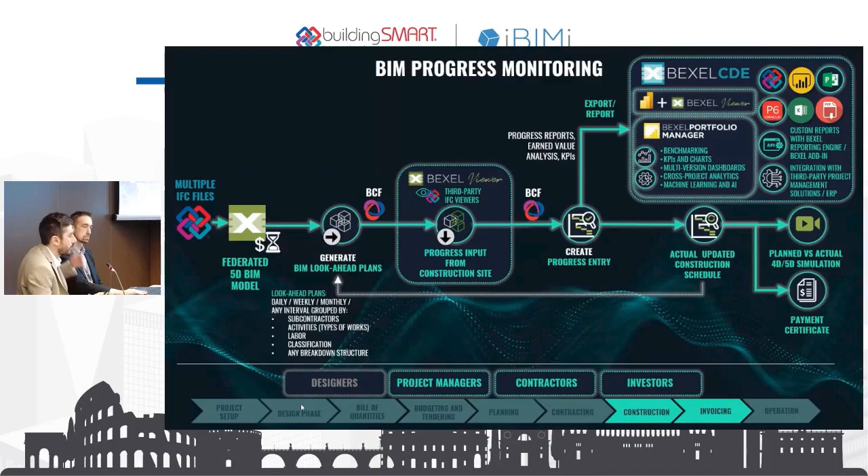And again, we have the ability to export that data in the form of Power BI, where again that data could be very easily managed and reorganized in the way that we saw in the previous case. So in this case, it's an earned value analysis.

So you can visualize through the color coding, let's say in this case, subcontractor. So you can see exactly which part of the project is dedicated to which subcontractor. So you can easily navigate and see who is working and who is responsible for each part of the project. They can just easily see what is the focus of their work. They could see exactly what their performance is.

So they could just navigate, drill through the data very easily, and see exactly where we are, what is the planned value, what is earned value, what is actual cost. We can just see which parts of the project are going great, which parts are going bad. We can visualize, in this case, schedule performance index, so we can see exactly in which months we were performing well schedule-wise, and in which months we had bad performance. Then we can discuss why this was the case.

But the point is that the data is, again, very transparent. Data is, again, very easy to understand for all the participants of the project, because there is no platform problem where you all need to use the same platform in order to see the data. You have free access and you can reorganize the data as you want. So it's a completely clear idea where you are.

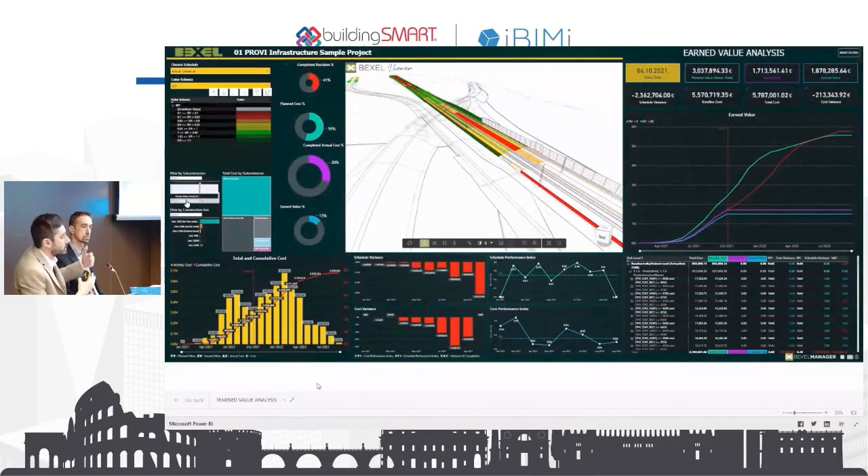So you can see, we started in red. That means that we had a pretty low schedule performance index at the beginning. We improved a little bit in the middle part. Then when we reached the viaduct, in this case, it went to green. So it's, I would say, natural progress of this project. You would say, okay, it's understandable that at the beginning we were not as productive as we expected, but then we improved throughout the time.

So you can see where the weak spots are and who is providing you with the relevant data, and who just doesn't have enough resources on the site, or whatever could be a problem in this case, and whatever could be a reason for good or bad results on the project. And again, as in previous cases, traceability: you can just very easily navigate and see it.

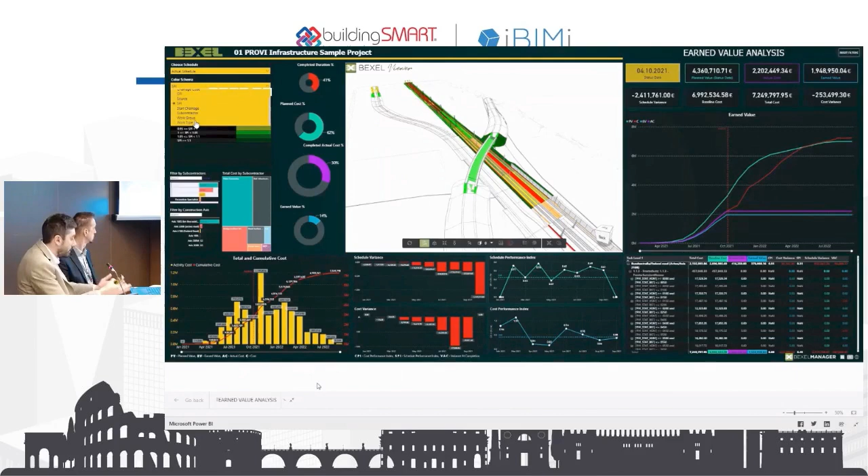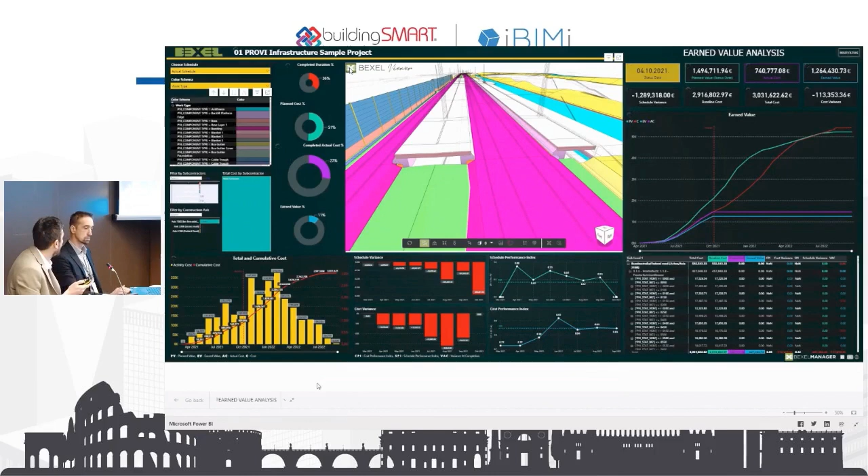Time-wise, I want to see what the performance was in that month, that week or that period of time. I want to see the performance of the subcontractor. I want to see by groups of works what the key performance indicators are. And I have a big picture, but I also very easily have a particular picture of a specific domain of my project, and I can very easily assess how my project actually works. So again, just to see.

Okay, so besides all of this, this was just the earned value analysis. We also have the ability to automatically export monthly certificates. That means that when you populate the progress that comes from the construction site, you have the ability to visualize the work that was executed in a certain period of time. And again, you have an overall picture with a very clear idea of the total cost, the cumulative cost up to that specific moment, what is executed in the certification period, the balance to finish, and so on. So you have a standardized way of dealing with monthly certificates.

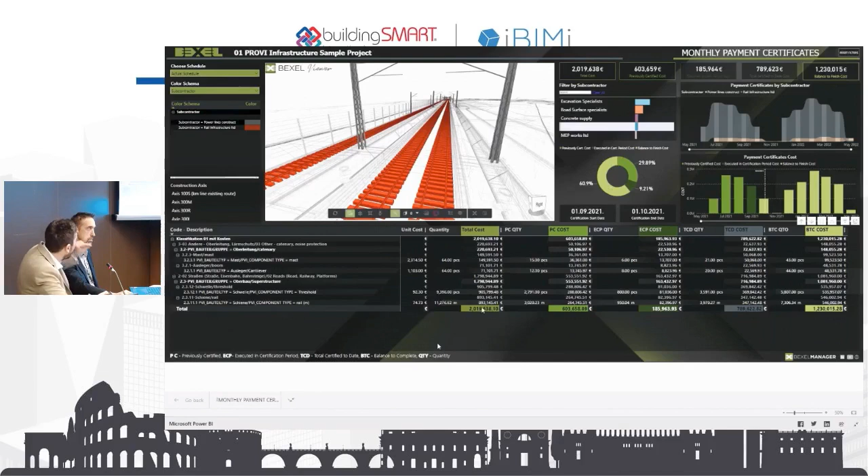But what is different from a standard approach, where you have some Excel spreadsheet or some PDF files and reports, is that, first of all, the data is traceable. So you can specify every cost item, every month, every subcontractor, and see exactly what was executed in which period of time. And you can verify it on the construction site. So the 3D model needs to reflect the actual data on the construction site. And another thing is that you can very easily sort the data and navigate to the part of the data that is relevant to you.

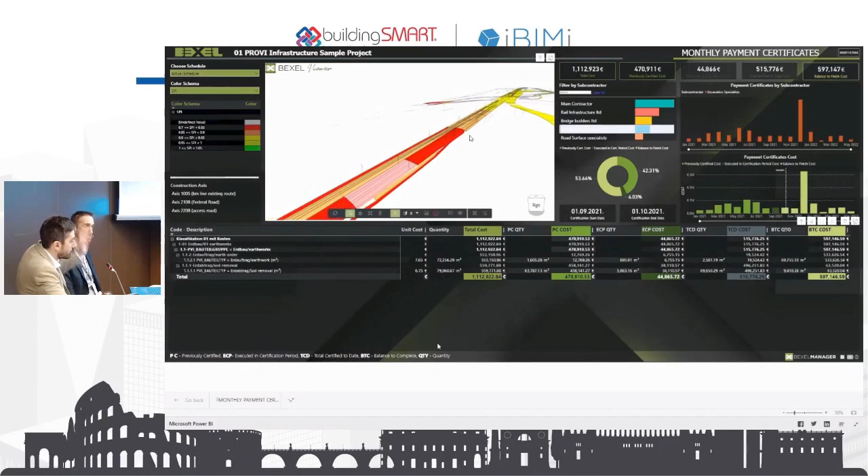Also, throughout this system, you can visualize the cost performance index, schedule performance index, all of these key parameters that could be very relevant for you and for your decision making throughout the progress execution. So you can simply select, like in this case, a certain subcontractor and visualize its performance cost-wise or schedule-wise throughout the time. You can compare their claims with the performance on the site to see if this is approved or not approved, and you have the complete history of what is happening on the project.

So, yeah, thanks. Okay, and just as we said,

Parallel to this chain of events of the workflows that goes from the start to the end of the project life cycle, you have two processes. One is reporting, which we covered in these different domains, but what you also have all the time is maintaining and updating of the federated BIM model. And this process also requires time, especially on big projects.

So what we're also working on is automated model update, or command center. At this moment it's in its infancy. We're first dealing with the automated BIM model for use cases where you have a huge project with thousands of different IFC models from different authoring tools that have to be regularly updated. And due to limitations of the hardware equipment, that takes an incredible amount of time.

At the moment, we have a workflow that could automate this process, to feed this data in a more automated way, and again to release resources, in the first place human resources, for more creative work and for analytics.

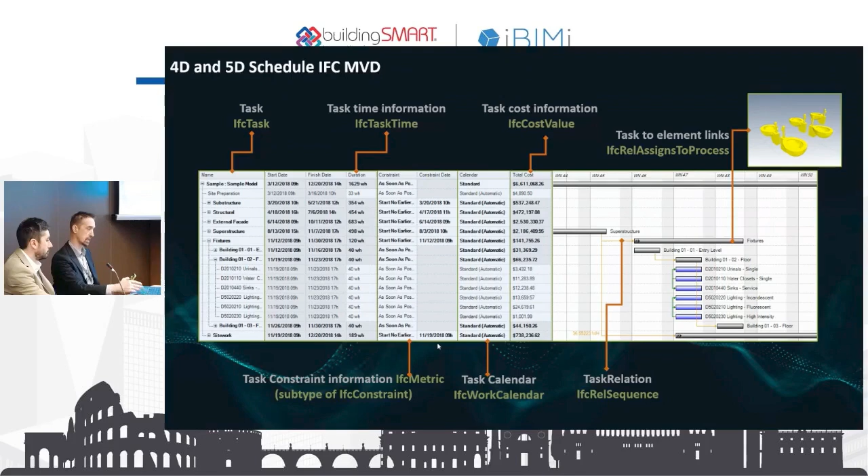Another one, related to cost, is a similar situation. We have already defined and developed the model view definition up to a certain level, but hopefully it's going to be improved, especially when it's possible to clearly define all possible use cases.

For example, currently we're missing a definition for cost classification, and it's really important because sometimes we need multiple cost classifications in a project, and there are multiple cost classifications in the world, or even the same company uses different cost classifications for different projects depending on the client. So it's really important to have this information available and linked to the original IFC information.

So for more aspects related to cost and scheduling, this is the slide. We as a company are included in the future development of IFC as well, and I'm going to briefly mention some ongoing topics. For example, task element sort order, which is currently of limited availability. At the moment we can use, for example, IFC alignment direction to show how the elements will be executed during the scheduling timeline. But if the model is updated in another tool, this information is lost, so the user will need to redo the linkage explaining the execution order when the model is updated.

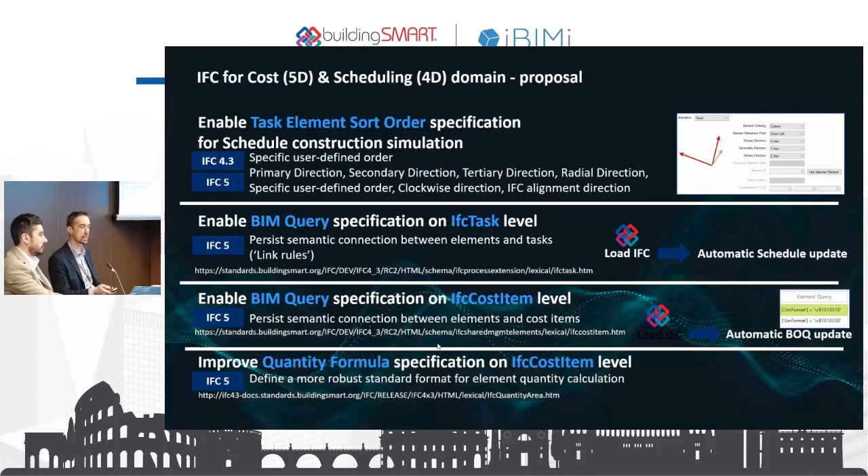When we update the model, we would like to automatically calculate the quantities and cost estimation of all newly created elements. We have additional proposals related to cost and schedule for more advanced functionality, such as progress entry specification, since the current progress specification is relatively limited. And the next one is related to task calendar and work calendar, for example, the calculation between predecessor and successor tasks. It depends how we calculate it, and it would be good to include it as well.

Also, we have more minor proposals related to, for example, relation specification between task and cost items and between baseline schedule as well. So that would allow us to produce earned value analysis as we presented previously in the Power BI reports.

Also, the same goes for location-based scheduling. So we could have some kind of zone sequential relations and specification that allows us relation between tasks and zones of the elements in the BIM project. And we do have a few examples that explain previous issues with the current MVDs.

For example, how the cost items from cost classification can be interpreted or used in the same, let's say, cost estimation or bill of quantity, but in a different structure. So it's also a common situation in a real project. So this is, again, another issue that we have to deal with.

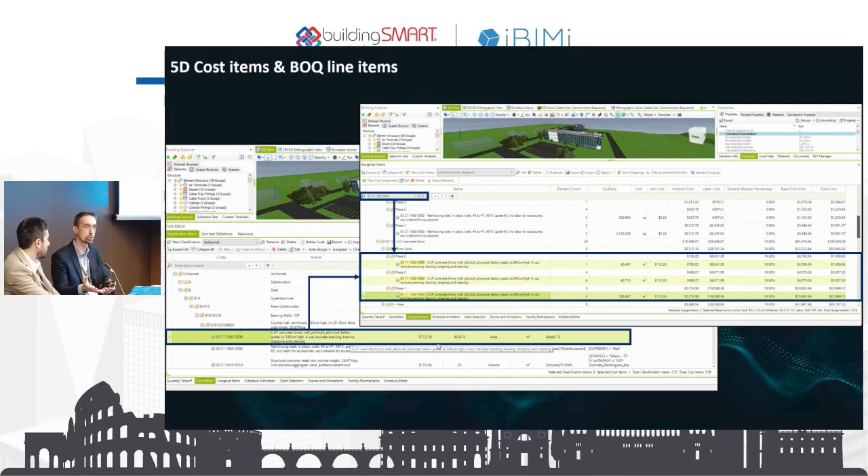Our bill of quantities, for example, can be differently structured than the original classification. If we have multiple building zones or multiple buildings, we have one project, one classification, but we want to organize these cost estimates related to buildings, or for example, related to subcontractors for tendering packages.

Okay. So another thing is, again, the ability to connect cost items with tasks. This currently is possible in MVD, but it's not used at the moment in a way that we would like, and also it's not much related to project management tools, where we have an entire concept in our application developed. We believe that accurate project management and the processes related to it are really important because that allows us to track activities, track resources, quantities, and so on.

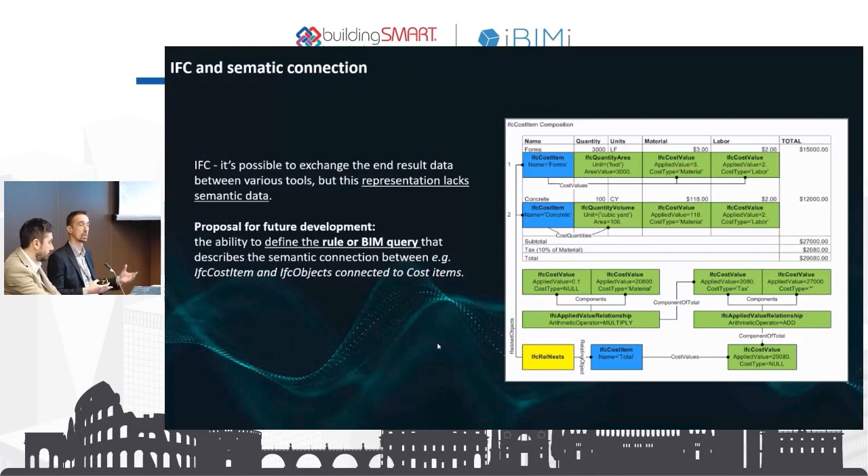This is an example of how the end results are created using available or current cost and schedule values, but we need some kind of logic behind that semantic which is currently missing. And when the model is updated, we would like to have all these items automatically updated, so we don't need to redo the process every time we update the project itself, or every time we update schedule or cost information separately.

Yeah, so we achieved in our application what we are proposing, and this is just a possibility, for example, rules or queries related to cost items that could be used to collect respective 3D elements and link 3D elements with the respective cost classification items or tasks information. And this is really good use. And also the quantity formula, which is used to calculate quantity and price related to 3D elements.

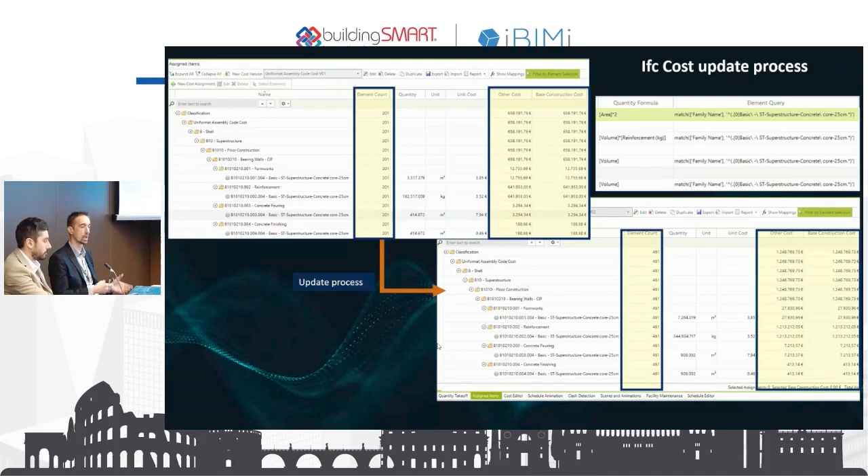And this one just shows the logic behind the cost items, which we used originally. We have cost items related to 3D elements and bill of quantity, and after the updates, the system automatically recognizes the updated elements based on these previously mentioned queries and quantity formulas, and the system automatically updates all this information, and we have it instantly. So we don't have to repeat the process from scratch again.

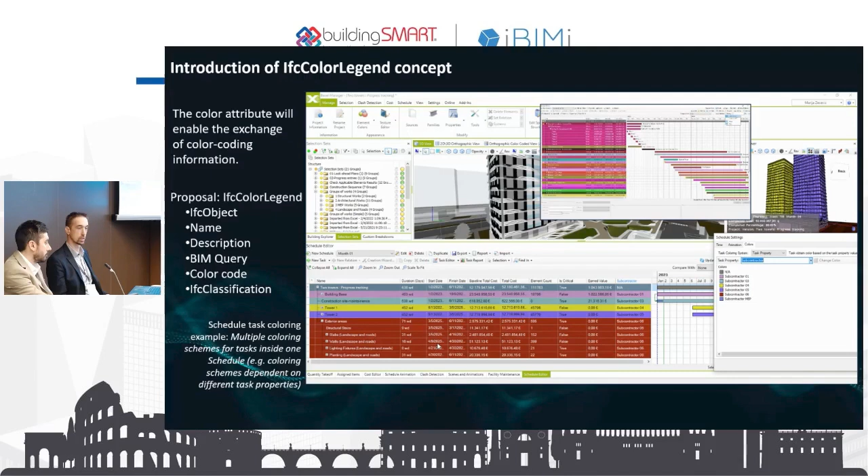And this is just another concept that we would like to discuss more in the future. And as you may see, it's more about possibilities that these things could enable, especially if the model is updated, as we mentioned several times today. So this is, I believe, the final slide for the presentation.

In the future discussion, we would like to enable schedule export even without 3D elements, and by, for example, enabling external references between cost and schedule items and 3D elements, preserving some kind of link and logic, we could easily exchange relatively small files with cost and schedule data and just use them on an updated or changed project that contains geometry, with preserved information and relations to them. So everything could be instantly updated and automatically ready to be used.